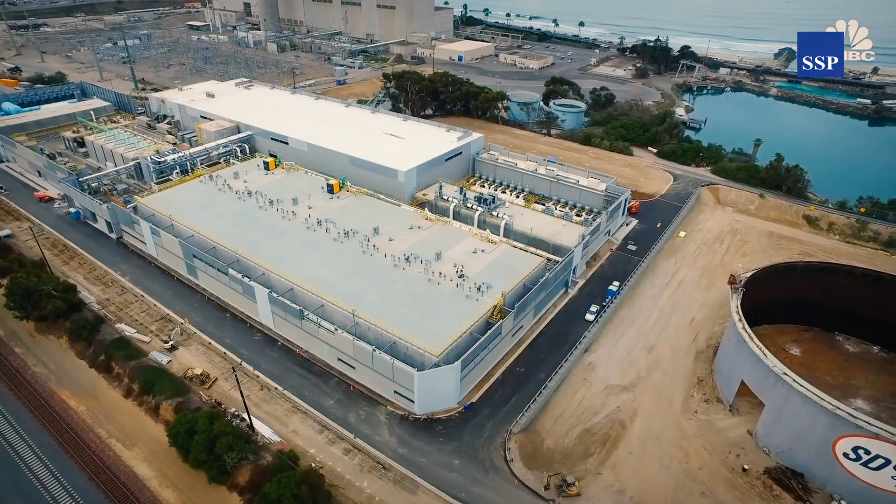With the ever-increasing demand for water, countries are looking at the world's oceans to fulfill the need for fresh water. For this, desalination plants are necessary, but also have a negative effect, and hence can be called a necessary evil.

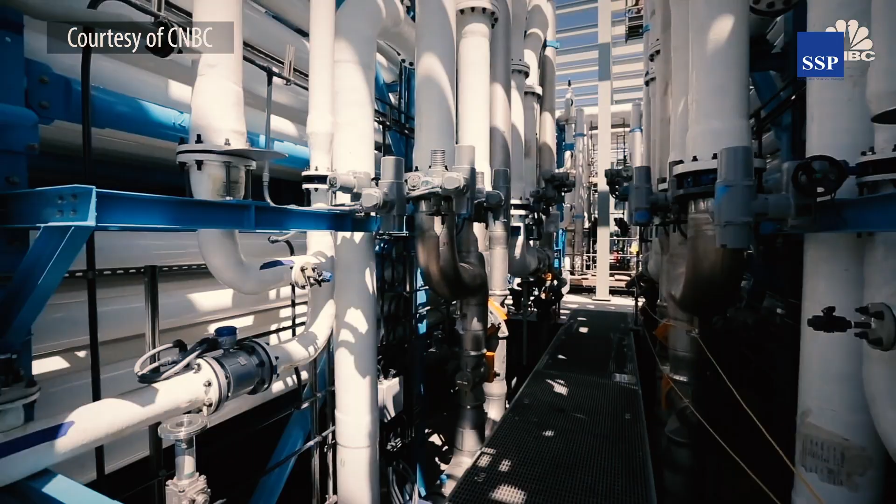What a desalination plant does is take water from the oceans or seas and purify it of impurities to give potable water for human consumption.

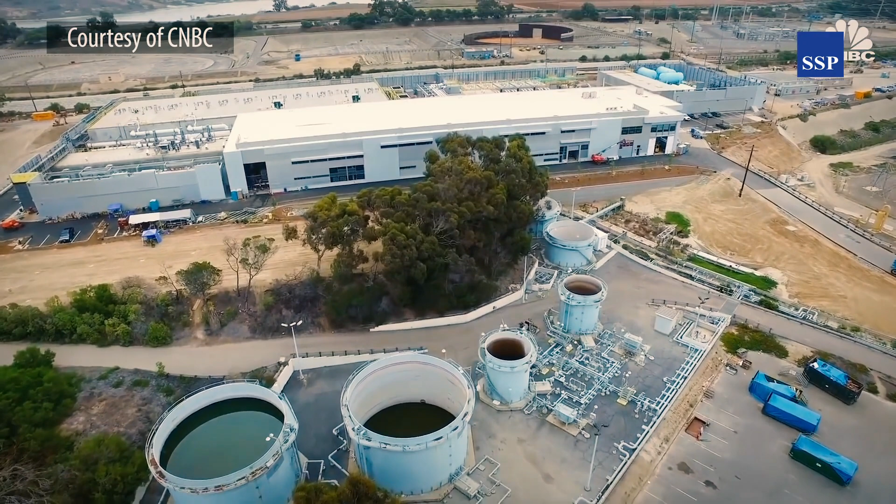But just like an RO system in our homes, to produce 100 liters of potable water, the desalination plant takes in 250 liters of salt water and spews out 150 liters of highly concentrated salt water back into the ocean. This increased concentration of brine is increasing the salinity of the oceans.

This is the effect of rising salinity of the oceans, which is adversely affecting the climate and is accelerating climate change.

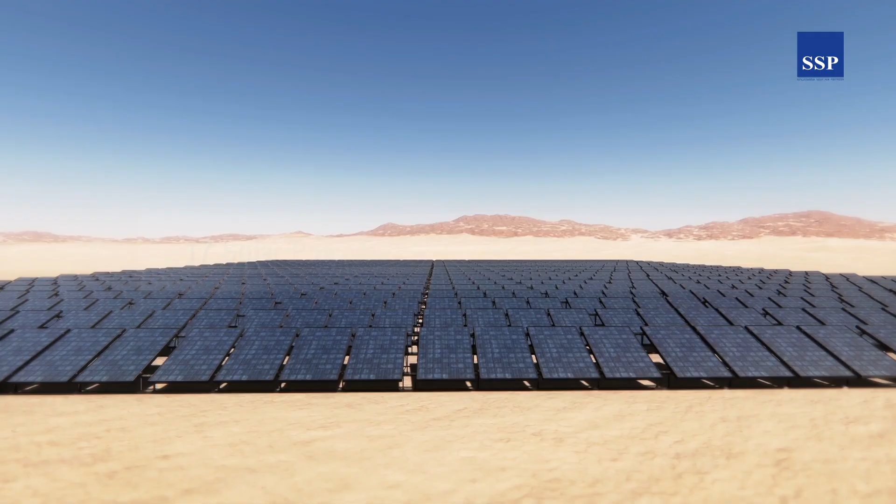With the ever-increasing need for fresh drinking water, Egypt is planning on setting up 17 solar-powered desalination plants by 2025 for production of 2.8 million metric cube of drinking water per day. However, the additional water requirement by 2050 in Egypt is estimated to grow by another 6.4 million metric cube per day.

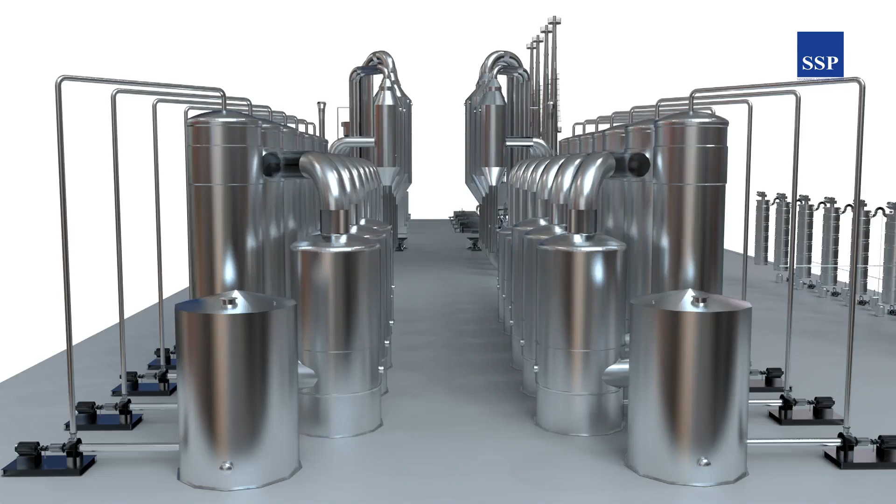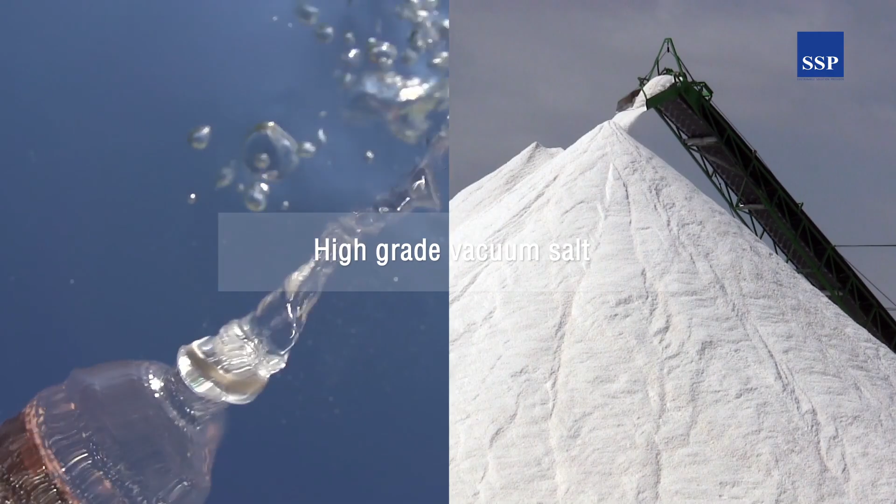We at SSP have developed a technology where we take the RO rejects from the desalination plants and return 99% potable water, and additionally produce high-grade vacuum salt that can be marketed to earn profits or mitigate costs for the desalination plant operator. This is one of those rare cases where the waste from a process can be transformed into wealth.

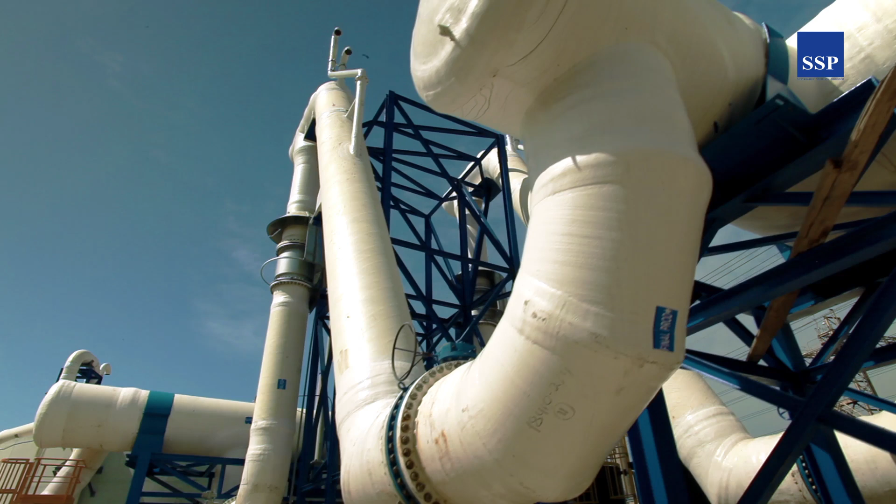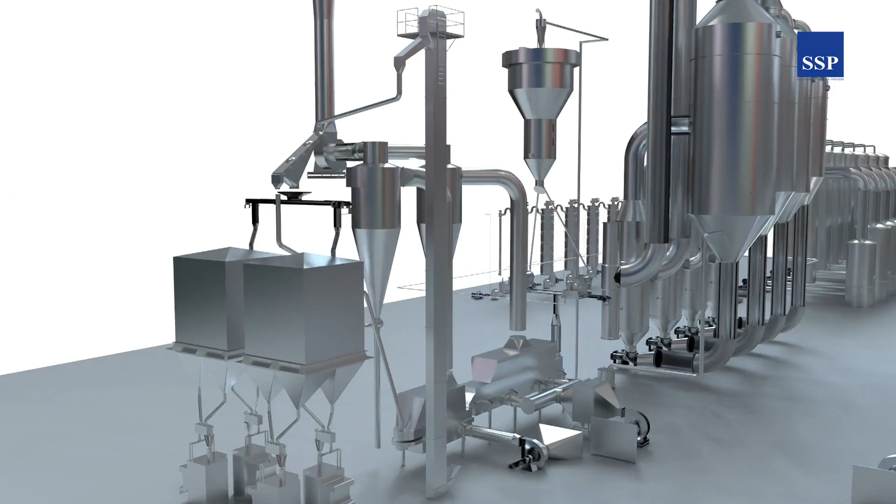At present, about 51 desalination plants are working in Egypt as per available data. All these plants are producing about 9.24 million metric cube per day of RO rejects, which is being pumped back to the sea. With SSP's technology, about 8.3 million metric cube per day of drinking water can be recovered from existing desalination plants in Egypt.

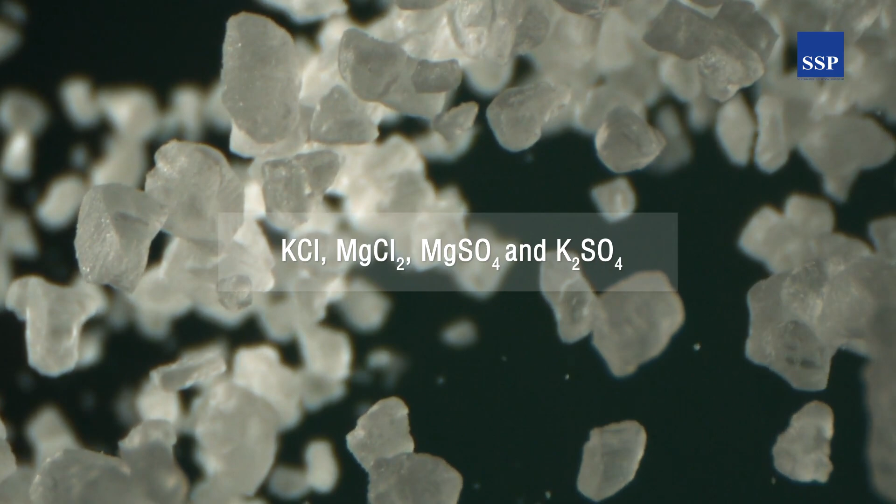Sooner than later, stricter environmental laws will prevail to stop discharge of concentrated brine back to the seas. Adopting SSP's system can save the environment as well as be a great alternative to traditional desalination plants that can just recover water but no salts.

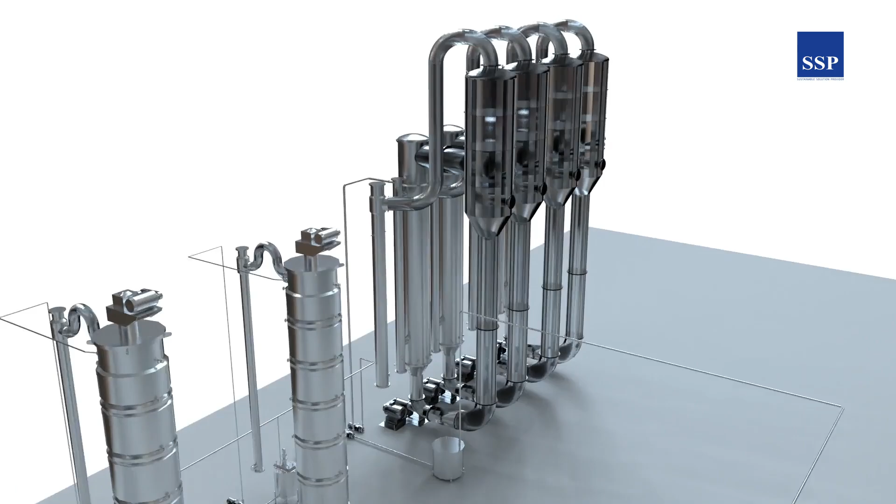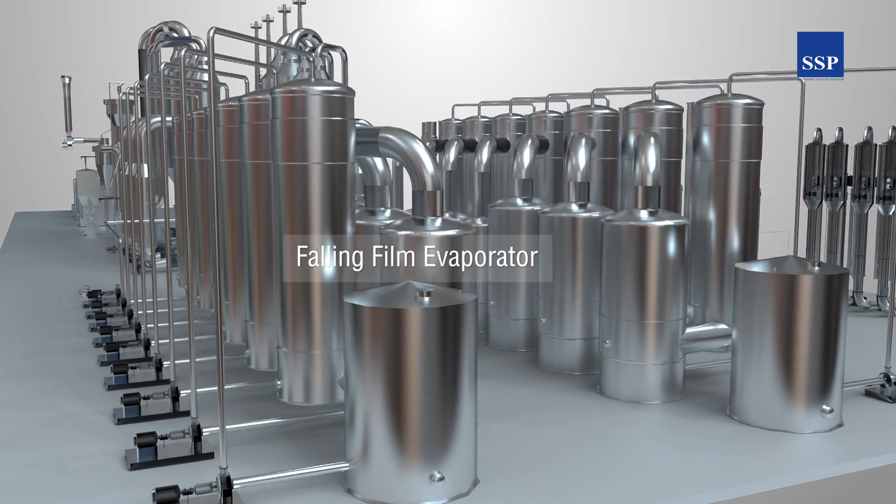Falling film evaporator: RO rejects or retentate will enter the system at 5 or 6% total solids. This feed will be concentrated to 25 to 26% total solids. Steam will be utilized as thermal energy for drying. The water evaporated in the falling film evaporator will be collected as condensate.

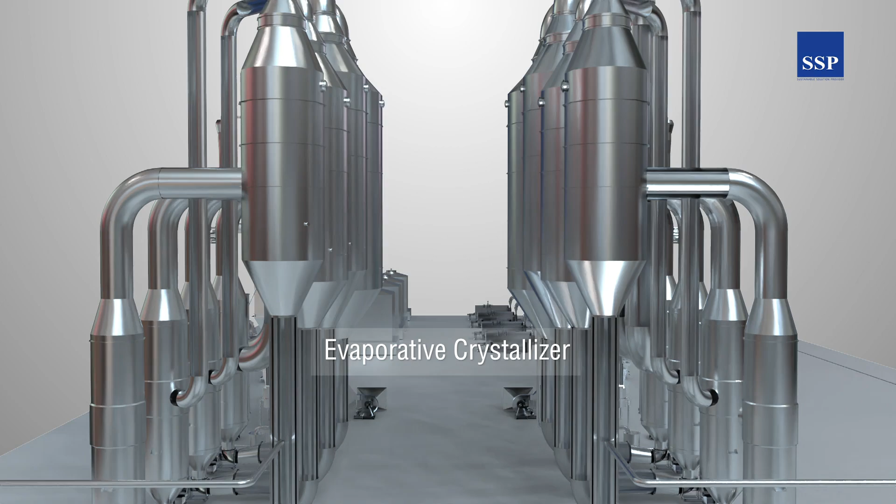Evaporative crystallizer: Concentrated brine at 25 to 26% from the falling film evaporator will be fed to the evaporative crystallizer for the formation of salt crystals. A 4-effect forced circulation evaporator will be used for the crystallization process.

Thickener: Salt slurry received from the evaporative crystallizer will be fed to the thickener. Here, dewatering of slurry will be done by separating salt and mother liquor. Mother liquor will be sent back to the balance tank again for further crystallization or the ZLDS process.

Centrifugation: Thick slurry from the thickener will then pass through a pusher-type centrifuge, which separates salt crystals from the slurry, and the liquid portion is collected in a tank. The liquid portion is then pumped to the thickener or ZLDS process.

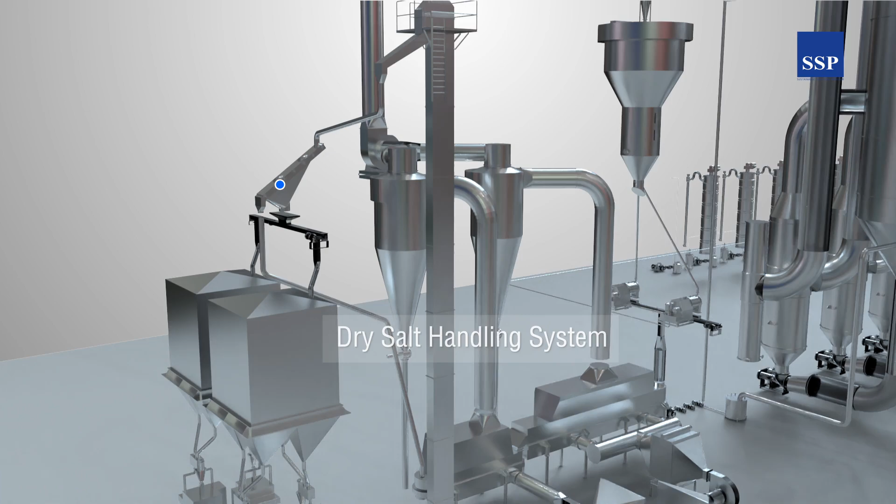Drying and cooling: The salt crystals from the centrifuge are dried in a fluid bed dryer. The salt, with 4% moisture, is fed to the fluid bed dryer through a screw conveyor where the iodization is completed. The crystals form a layer on the perforated sheet present in the drying chamber of the fluid bed dryer and are dried by means of hot air. Fines from exhaust air will collect in a cyclone separator and are collected separately. Dry salt from the outlet of the fluid bed dryer is passed to the sifter through a bucket elevator.

Packing: Dry salt will be stored in silos and finally will be packed. Zero liquid discharge system: All the overflow or reject from the system will be fed to the ZLDS system for removal of zero discharge of liquid impurities from the plant.

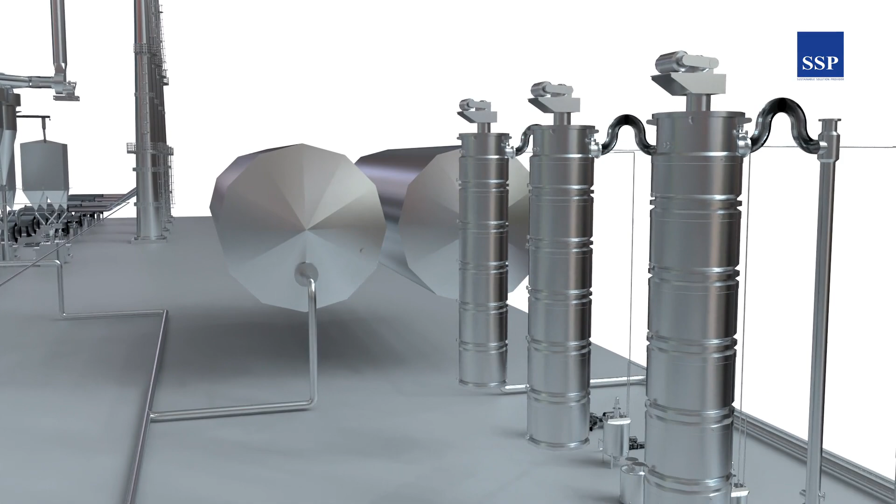The condensate from the entire system flows into the storage tanks, which is the total water recovered by this plant. The byproduct coming out of the entire system is potable water.